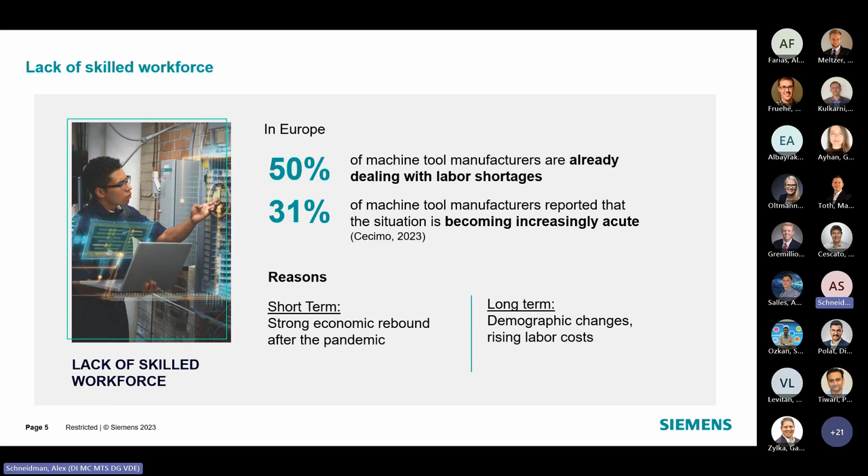This means companies must invest much more effort and money to recruit and retain people, and the statistics are staggering: 24 months, 2 years of salary to replace one capable employee. A huge, huge cost.

So let's consider the implications of these two trends that we saw: fewer people going into the industry, higher turnover, higher cost to recruit people.

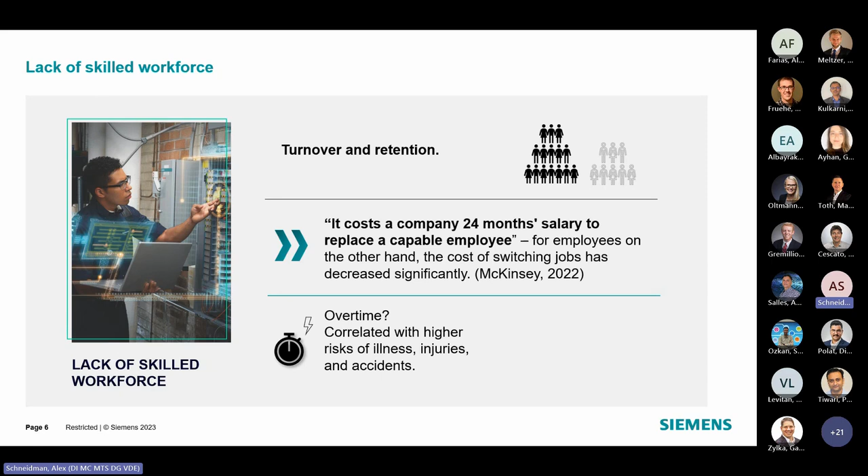I can give you one example from a factory that I visited in Germany. I was working with the production manager on the shop floor, and they have completely identical machines, around 20 machines in the hall. In front of one machine there was a huge robot, a very complex one with a lot of cameras, because they had to position the parts very precisely, and it was very big, very expensive, and very, very slow.

Next to it, there was a machine on which the operator was loading and unloading the parts. I actually measured, and the time it took the robot to load one part was 3 times longer than it took the operator to load exactly the same part into an identical machine. So I asked this manager, why do you bother? Why do you have to invest so much money when a human makes the job, which is quite simple, much faster?

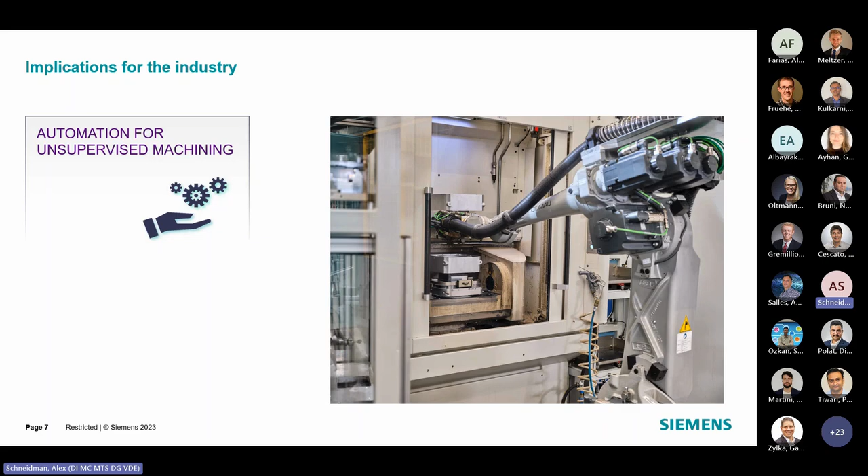The answer is that we see an additional shift in the industry. If we want to use people who are not highly skilled, or make people productive quickly without investing heavily in their training, this means we need to use applications and solutions that are very easy to use. In other words, we need solutions that are intuitive to use.

Because if a product or piece of equipment is very complex to operate, then unskilled or not highly skilled people will have a hard time operating it correctly, and this will lead to additional cost, expensive production delays, and whatnot.

If the equipment is expensive and you need skilled people, then once the skilled person leaves, it will be very costly and a very long effort. Remember this, 24 months salary to replace one worker. It will be very expensive to replace such a person.

In either case, if you want to use automation, it must be easy to use, so even unskilled or not highly skilled people can operate it efficiently. Otherwise, you'll have incidents, accidents, and the costs are going to be high.

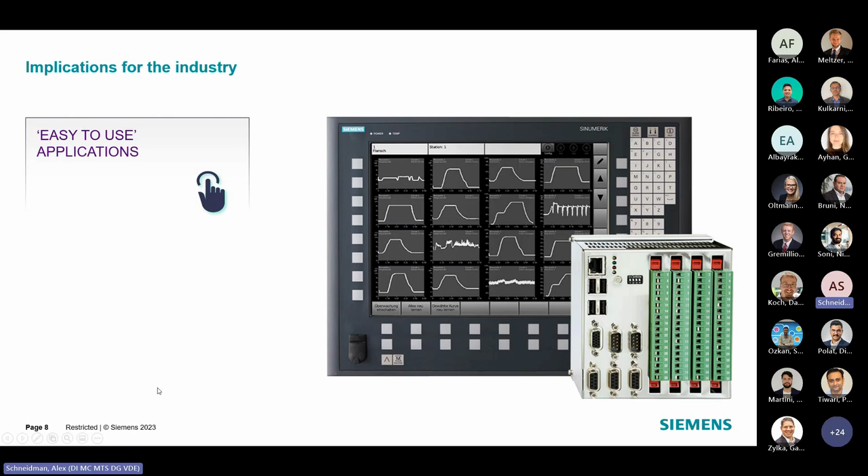When we are talking about automation and unsupervised machining, let's say we implement them to address the challenge of workforce shortages, they actually introduce additional challenges. The first one is tool breakages.

Why is it a big problem that the tool breaks when the operator is not there? There are three reasons. The first one, undetected breakages are expensive, because they lead to production delays, they lead to scrap parts that have to be thrown away, money wasted, and they also lead to warranty costs.

Because if you accidentally ship a faulty part, let's say you ship an engine block without oil channels, and this engine overheats and blows up, the manufacturer of this engine block will have to pay tens of thousands of euros or dollars in warranty costs.

Expensive. The second challenge with breakage detection is that it's not easy to do. So people use expensive laser systems, mechanical probes, to overcome the challenge of breakage detection. This is a level of automation, but it introduces additional complexity because these systems can also break, and they slow down the process, because if I have to measure my tool every time it's used, I'm adding seconds and more to my process, reducing the throughput of my factory. So it's a very hard problem to solve.

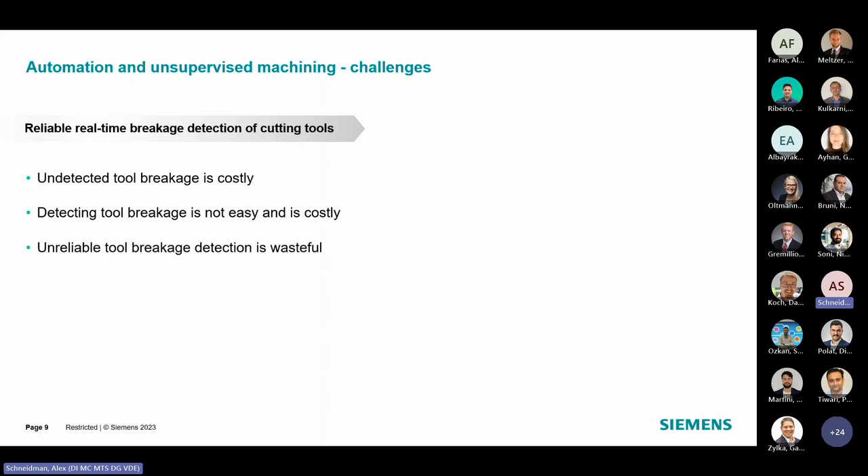Now let's assume for a moment that you already solved the challenge of reliable breakage detection, everything fine, it's always reliable 100%. You have another problem. Because if the tool breaks, this means that something already went wrong. Actually, what you want is to avoid these breakages. You want to avoid anomalies that lead to expenses, that lead to wastage and other costly damages.

So what you want is actually to avoid anomalies. You want to have a very stable process, a very repeatable process. Now, why is it important to avoid anomalies?

You can say, okay, when my tools break, I replace them, so what? But in reality, the situation is much more complex, because when there is an anomaly, it's not necessarily a breakage. It can be very high load, for example, on the tool. It can be some signal that exceeds certain thresholds.

So when you detect an anomaly, you have to decide what to do with it, you have to devise ways to cope with it. If I detected something bad, what do I do? Do I rework the part now again? Do I send it for extra quality check, surface quality check? Do I throw it away? In any case, you have to design actions to handle detected anomalies, and this adds complexity and risk.

If you're already adding additional procedures, you're adding additional steps to your process. So on one hand, you introduce automation to remove the people, but on the other hand, you made your process much, much slower. That's what actually happened in case of Tesla. So anomalies that are not avoided, anomalies you have to address, are adding manufacturing cost.

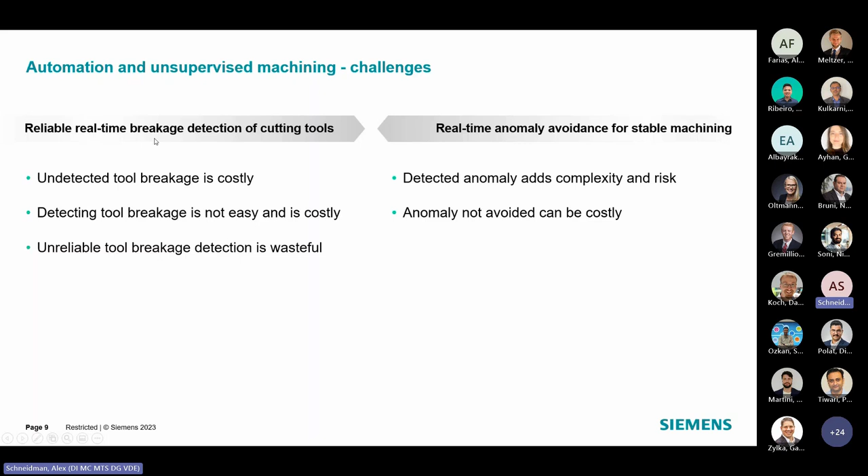Let's see now a short video that summarizes these challenges and how to address them in around 60 seconds. We always want the production process to run as smoothly as this one.

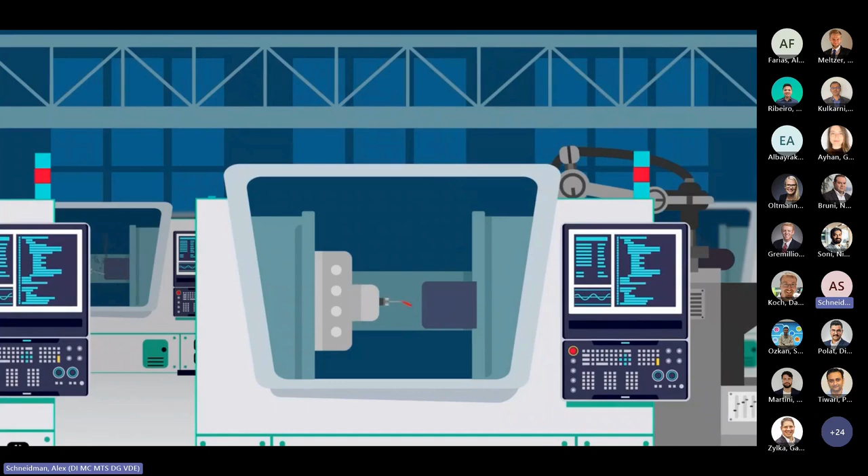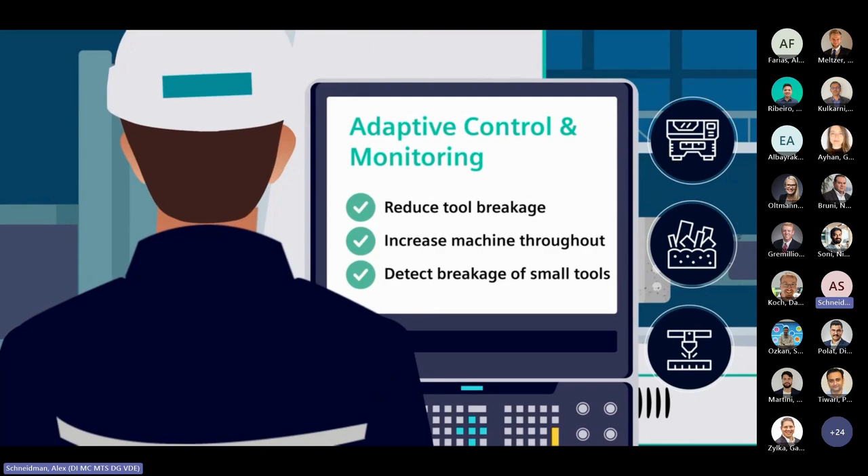But this is not always possible. Under pressure to deliver on time, we know you can't have an operator in front of every machine to prevent scrap parts. Besides, there are not enough skilled people to hire. You can avoid scrap parts and increase machine throughput without time and resource-consuming investments. Real-time detection of broken tools, combined with adaptive control, reduces your losses and increases your revenue quickly. This is possible without disrupting the production. Thanks to ACM Suite, you can reduce tool breakage and increase machine throughput and reliably detect breakage of small tools. Importantly, you can achieve these goals without making any changes to your NC programs or requiring more machine operators. Adaptive control not only improves the machine throughput, it also automatically detects and mitigates abnormal cutting conditions before they cause cutting tools to break. Used together with real-time tool breakage detection, you improve revenue and cut costs.

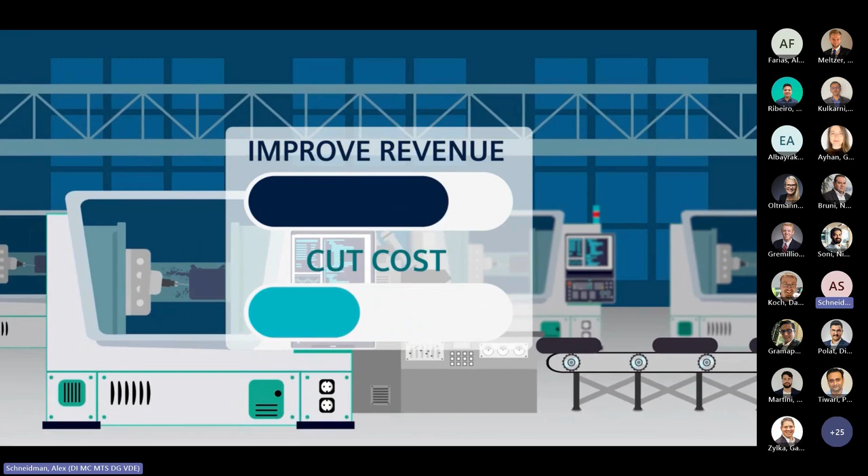Okay, so now let's try to summarize everything we just talked about in one slide, kind of a flow chart. We said the first challenge is lack of skilled workforce. This is a trend in the industry, and it's only going to get worse. The answer is to have solutions that take the human out of the loop, so you're manufacturing without people, and you also have applications that are easy to use because it's a problem to retain and train highly skilled people.

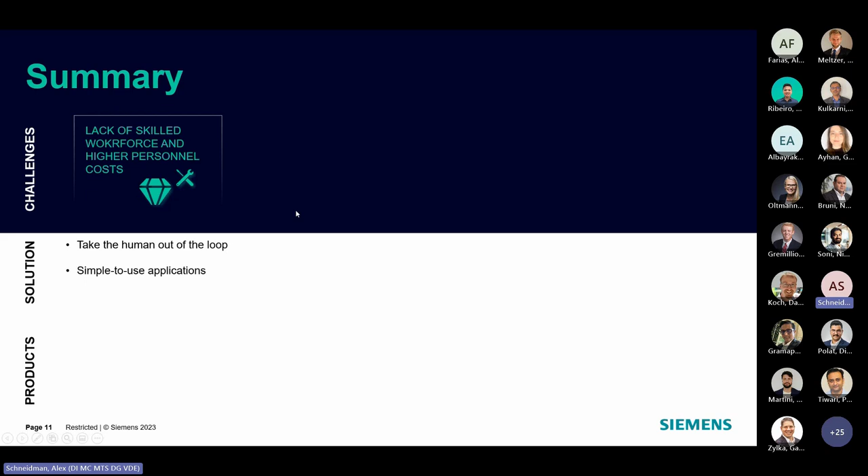Now, the moment you take the human out of the loop, this means you introduce automation, but automation in its turn introduces additional challenges. This means you need real-time monitoring and control of all the robots and automated processes. You also need, shown here in gray, remote monitoring control, because either you're at the machine monitoring it, next to the robot, or you are away. And if you're away, you still need to be able to monitor the processes, and you also need means to automatically load and unload blanks and workpieces in and out of the machine. But these two are outside the scope of today's learning bite.

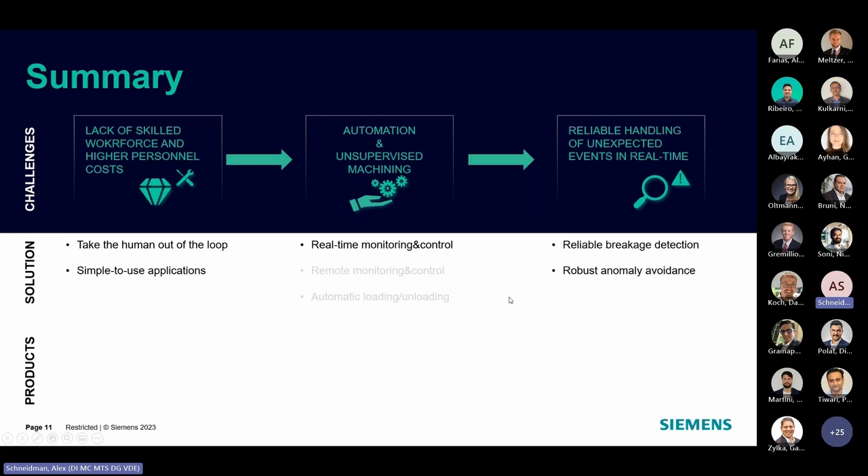Now, when you're talking about real-time monitoring and control, you actually have another challenge. You need to be able to reliably handle unexpected events, in real time. And as I mentioned, the answer is, first of all, reliable breakage detection, so if something went wrong, you can detect it quickly and reliably without false alarms. But you also want to avoid anomalies as much as possible, anomalies that lead to tool breakages. So this is kind of a short flow chart of a challenge, an answer to the challenge, additional challenges introduced, and eventually a solution.

And in case of MACHINUM, the two products you saw in the video are: one, Analyze My Workpiece Tool Monitor, for reliable tool breakage detection, and Optimize My Machining Adaptive Control, for anomaly avoidance. Now, these are not the only products in our portfolio in MACHINUM that address the challenges of unsupervised machining and automation. There are additional products, Analyze My Workpiece Monitor and Protect My Machine 3D Twin, but they're not part of today's discussion, and we will discuss the use cases for these products in later learning bites.

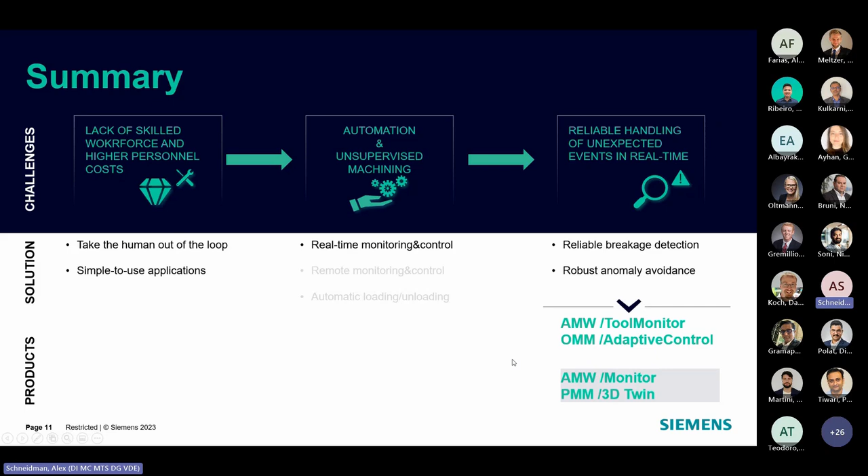This is the last slide. So as Gokchi promised, it was within 20 minutes. What we saw today is that the industry has a challenge of recruiting and retaining people, and this forces the industry to invest in automation and unsupervised machining, despite all the challenges related to this process. And if manufacturers want to go further, if they want to endure in the industry and not go out of business, they simply don't have a choice. They must introduce more automation. They must think about manufacturing without operators in front of the machine.

And to help machine users cope with these challenges, we have products within the MACHINUM portfolio that allow them to effectively and efficiently implement automation and get operators away from the machines. We focus today on ACM, but these are not the only products in the portfolio that focus on enabling automation and unsupervised machining, and these we will cover in future meetings. That's it. Thank you very much for your attention.